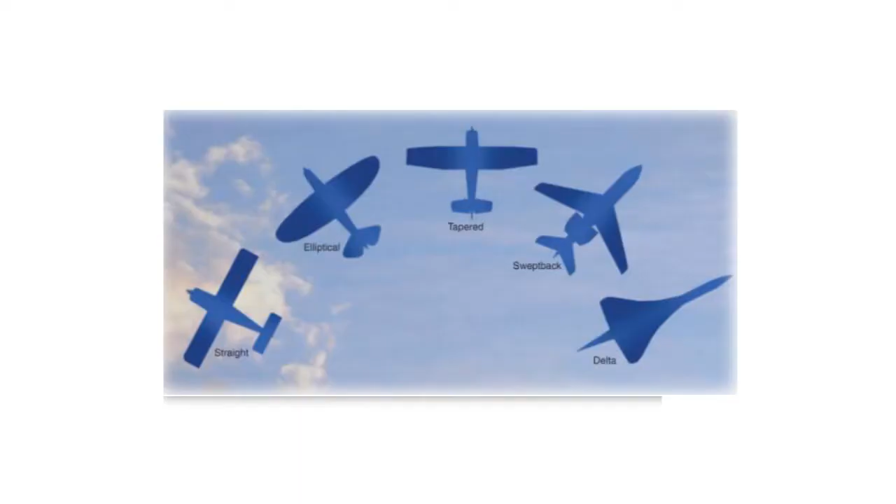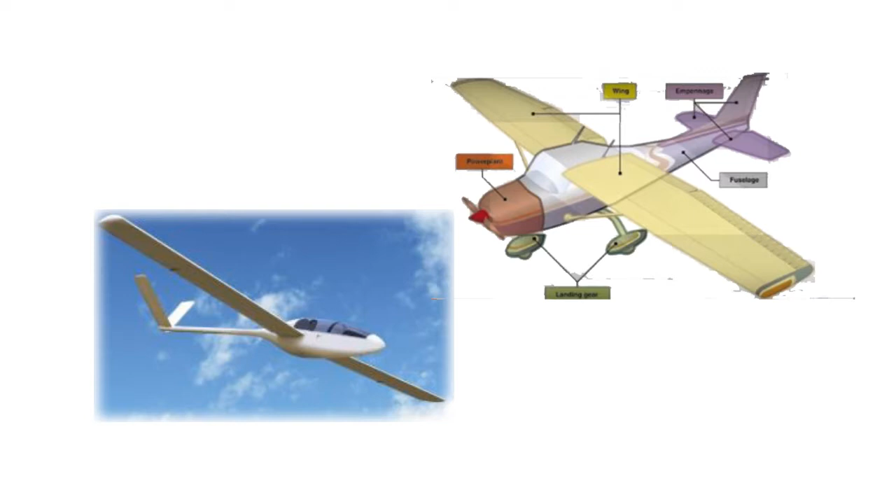We have different wings for the aircraft. What does it do in the first place? The airplane can almost not fly without the wings. I repeat, the airplane can almost not fly without the wings. Is it possible to fly at all without the wings? Yes, there are things called wingless aircraft these days, but primarily the aircraft needs wings or some kind of wing device if it's to take the form of the traditional airplane.

And so the wings are very important. Not to even talk about the attachments to the wing, just the function of the wing itself. It's a lifting device. Without lift, the airplane cannot stay in the sky. The wing is the substance, the part of the airplane that sustains the lift that's acquired by the airplane.

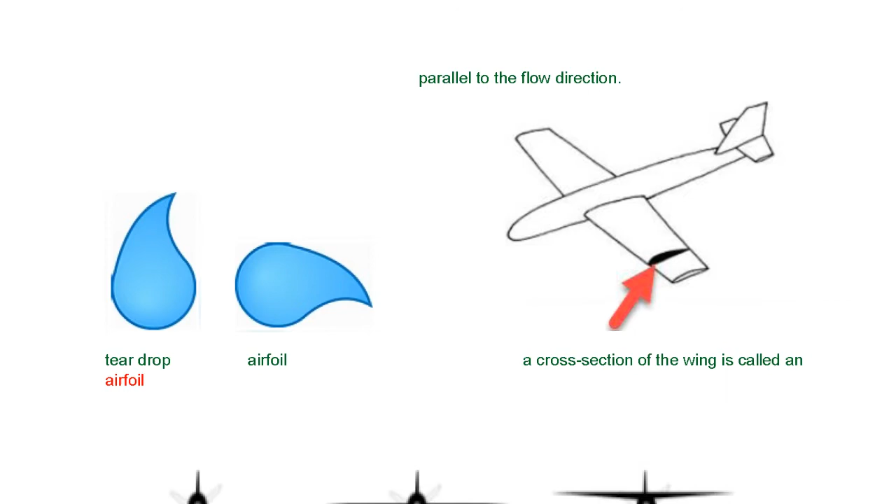How is the lift acquired? Well, there are theories, but the predominant theory is the aircraft lift theory, which is basically the airfoil theory. What is the airfoil? The airfoil is essentially the shape of a teardrop. A teardrop goes down from the face, but if you look at a teardrop and slide it in the perpendicular direction to the direction it normally comes from...

A teardrop, or a raindrop, comes down to the ground in its natural direction. If you turn it so that it's perpendicular to its natural direction of flow, that would be the shape of the airfoil itself. That's the shape of the teardrop, which is also the form of the wings we have. So a section of the wing of the airplane is what's called an airfoil.

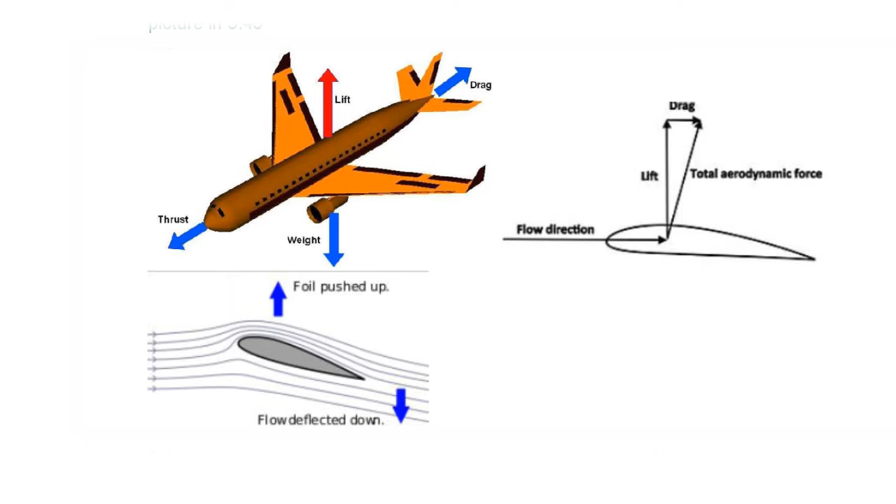And the airfoil theory shows that there is greater speed on the top of the wing, and lower speed on the bottom of the wing. The lower speed has greater pressure. The pressure pushes the upper portion, so the aircraft stays aloft. Yes, there's the power that's provided, but what uses that power to stay steady in the sky is the aircraft wings. And so we'll look at various aspects of the aircraft wing and the different designs of aircraft wing, and hopefully we will have some enlightenment about the wings.

And who knows, some of us may go on to start to generate new wings. There's no limit to knowledge, and we may think, oh, they've all been found out, until somebody comes with a new one, just as amazing as the first one that was introduced by the Wright brothers and their counterparts when they were doing the aircraft. So let us look into aircraft wings.

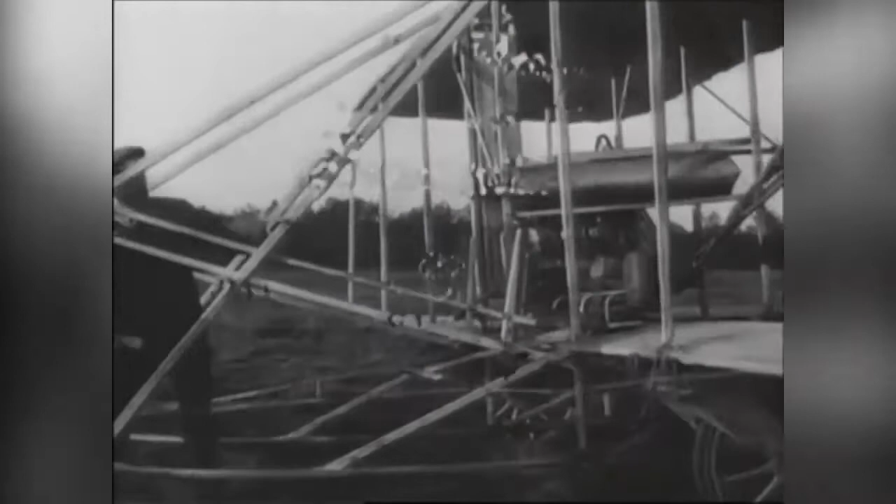We have different types of wings. Long ago, when the Wright brothers and their colleagues and predecessors started to design airplanes, the airplanes they designed were bi-winged, with double-wing aircraft as shown here, because they wanted more lift. Lift is a function of the surface area of the airplane, so by having more than one layer of wings, they had more surface area. They also had greater structural strength, so greater lift and greater structural strength.

But these wings were connected by wires, and these wires added to drag, so they had much greater drag. Eventually progress was made, and a single wing thicker than a single portion of the double wings was devised. So these days we don't have double wings and triple wings anymore. But they did fly, and there was a reason for their introduction, until better material and better knowledge of wings came along.

From the onset of wings - the double wings, the triple wings - that line goes back to the typical Cessna, a common sports utility aircraft these days, then to the big transport airplane with its majestic wing span and trapezoidal form of wings, and to the fighter aircraft with delta wings that seem to have no tail at all. We'll talk about tails in subsequent lectures, but it's all wings, taking the form of delta - delta being the capital Greek alphabet, the form the aircraft has taken.

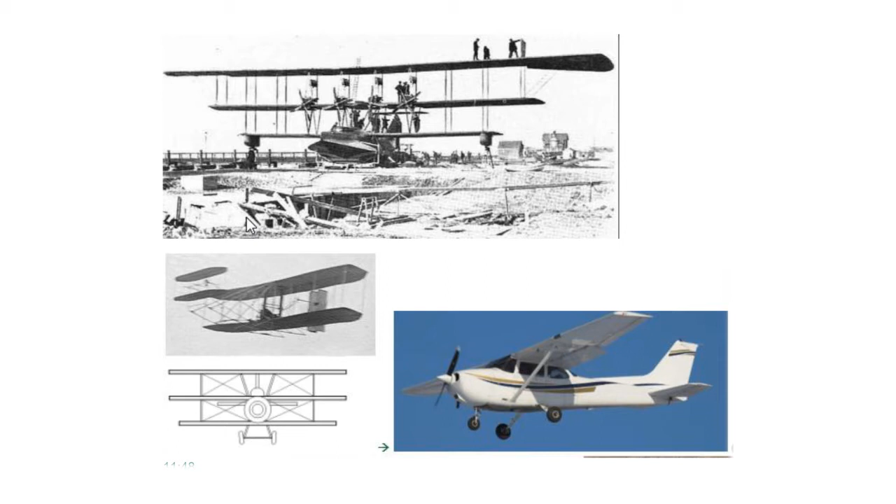They are sometimes classified by speed realm: subsonic, supersonic, hypersonic. Subsonic ranges from very low speed, the kind you have in a small aircraft, about 350 miles per hour, up to about 0.8 the speed of sound - we still call that subsonic. Supersonic is generally 1.2 the speed of sound to about 5 the speed of sound. Generally it's not a hard boundary, but that's how it is. Hypersonic goes from about that onward to the high end.

There's a range about 0.8 to 1.2 Mach number called transonic, transferring from subsonic to supersonic speed range. The hypersonic range is usually Mach 5 and above. Wings can also be classified based on geometric shape: rectangular wings, trapezoidal wings, moderate taper, high taper, elliptical wings, delta wings, swept wings, all kinds of wings like that. So those are some of the forms of wings we have for an aircraft.

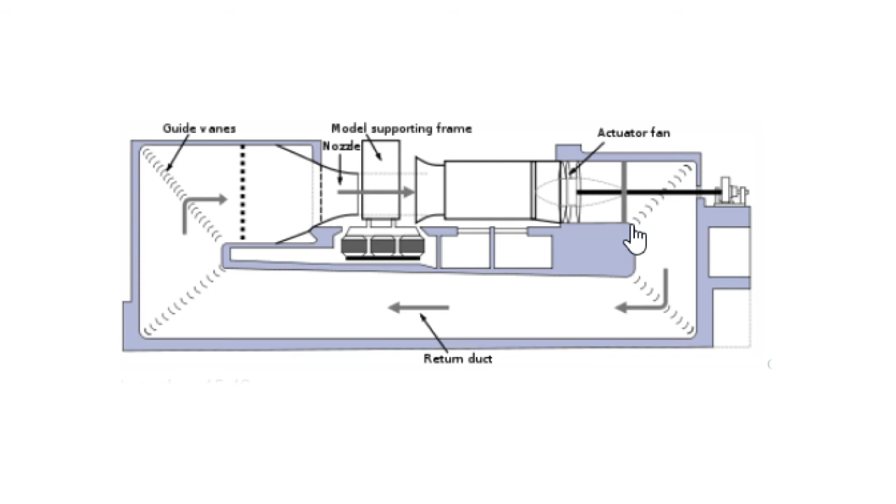Then we have the supersonic tunnel, the shock tunnel, and other types of wind tunnel. There's even the water tunnel sometimes.

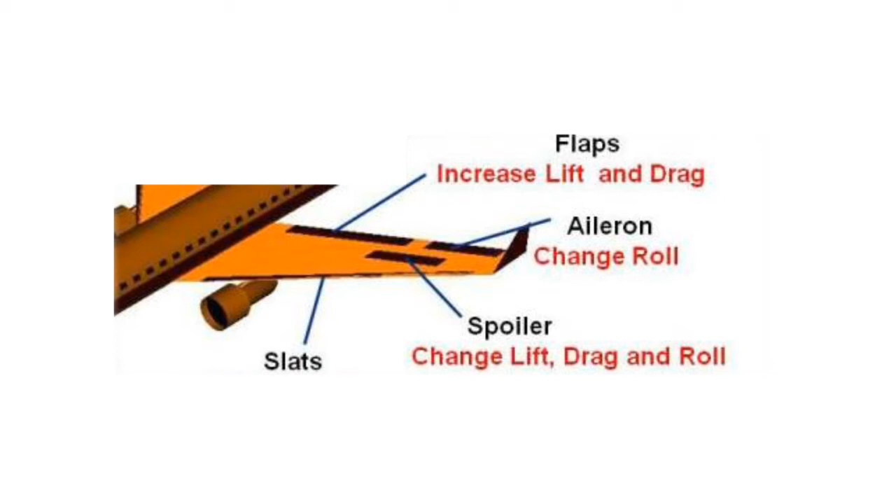The aircraft wing essentially consists of the aileron, the flap, and in some advanced aircraft, the slat and the slots. We will show you in the diagram for the aircraft where these function. Essentially, the aileron is a control device, kind of supporting the control devices that are prominent in the tail. It helps in the turning of the aircraft, because the correct turning of the aircraft is called banking. It's a three-dimensional turn. You use the aileron in doing that, where one wing portion goes up and the other goes down.

The flap is essentially a descending or ascending device in the aircraft. Then for the wing, structural strength is very important, and a number of things are considered: is it a high-wing aircraft, a low-wing aircraft, a mid-wing aircraft, or in very rare cases, a wingless aircraft? There are conditions for generating these types of devices, that is, whether we want a high wing, mid-wing, or low wing, because there's structural integrity it has to have with the body of the aircraft, the fuselage.